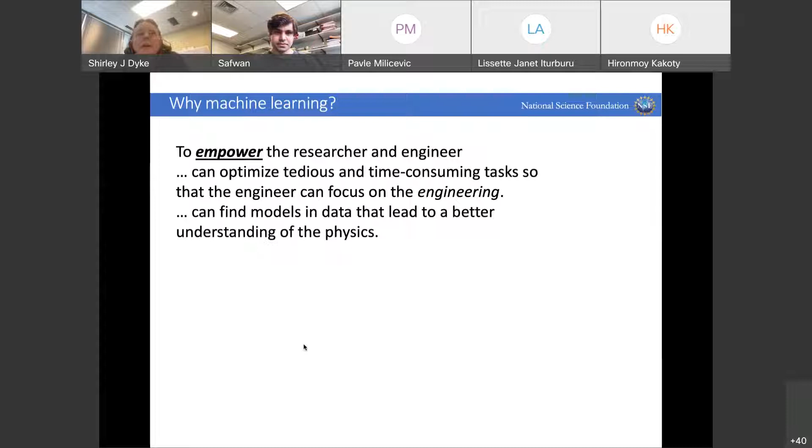I don't think so. We're here to figure out how to use machine learning. We're researchers, we're engineers, we're probably not going to develop new machine learning algorithms. But what we can do is figure out how to empower the researcher and the engineer to optimize tedious, time-consuming tasks, so that we can really focus on better engineering. How can we find models in the data, or information in the data, that might lead to a better understanding of the physics?

I like to show this in some of my presentations, and I'm just going to repeat it here briefly. What we often do is the typical solution approach: we build a model, maybe a finite element model. We input our inputs, the forcing function or whatever it is, into our model, and we get an output. That's what we learn to do in our classes, and that's what we learn to do for many of our research projects. But machine learning turns that around, and we say there's an input that we know, and there's an output that we know, but what we don't know is that process, that model.

This is the machine learning approach. We're trying to find the process. And if we can find that process, then we can spend our time focusing on gathering good quality data and focusing on the engineering that we can learn from that problem. So that's just, in a simple way, the way I like to think about it. We're trying to find the process.

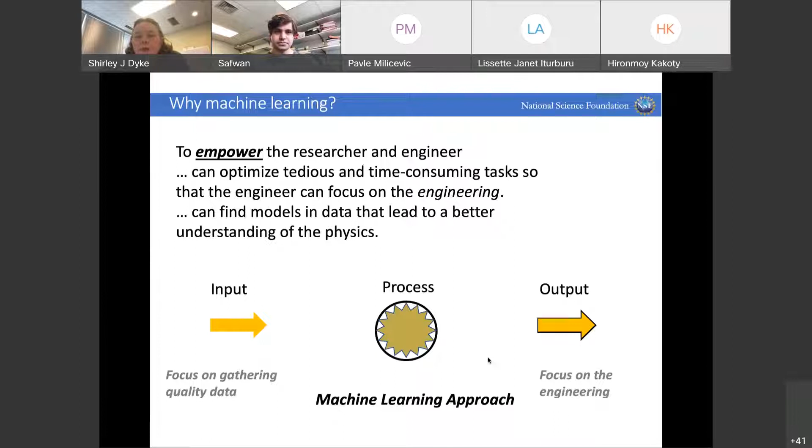We hope that by finding that process, we're going to be able to reveal or understand the structural behavior better. For the most part, we're structural engineers, wind engineers, doing those types of things. So we want to understand better how to build these structures, and we want to improve the hybrid simulations that we do, and we want to learn more from the tests and our data. So we're not trying to do machine learning to do machine learning, or to advance machine learning, but to figure out how to apply it to the problems that we want to solve.

Hi Shirley, this is Jim. I sent you a chat. I was going to have Safwan present. I had kidney stone mishaps this morning, so sorry about that. I'm here, but it's best if Safwan presents, he's done all the work, so he's well qualified to get the credit.

Can you see my screen? This is Safwan, yes we can. It's not in presentation mode, maybe you want to put it in presentation mode. Is it fine now? Okay, thank you Professor Ricles. So my name is Safwan, and I work with Professor Jim Ricles.

Most of my research is about real-time hybrid simulation, and I will be showing you a way where at Lehigh we managed to integrate real-time hybrid simulation with machine learning.

This includes the soil structure interaction. Especially if you have a building and you're trying to assess its behavior under multi-natural hazards, you want to include the soil structure interaction and know the response of the building if you include the interaction between the building and the foundation.

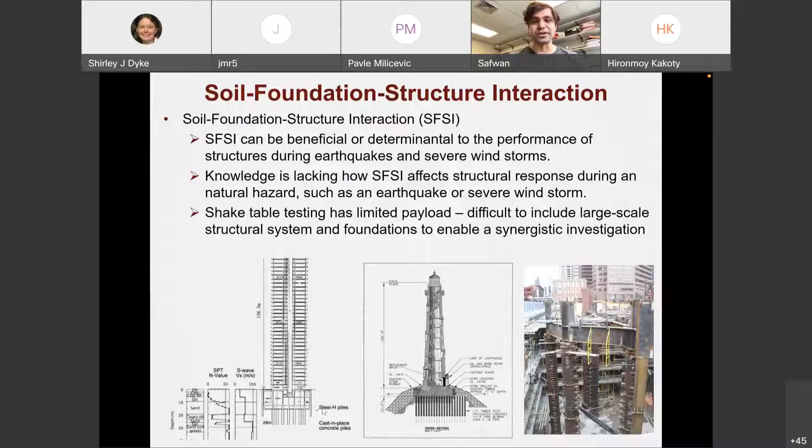Here is a real-time hybrid simulation case study. You have a 40-story steel building with 4 basements and 40 stories above grade. The building is located in Los Angeles and designed by SGH. The purpose of this study is to improve the behavior of the building and assess its performance under multi-natural hazards.

If you look at the building, we put nonlinear viscous dampers, highlighted in red, between each outrigger column and outrigger in the building. We use real-time hybrid simulation to assess the behavior of the building in real time.

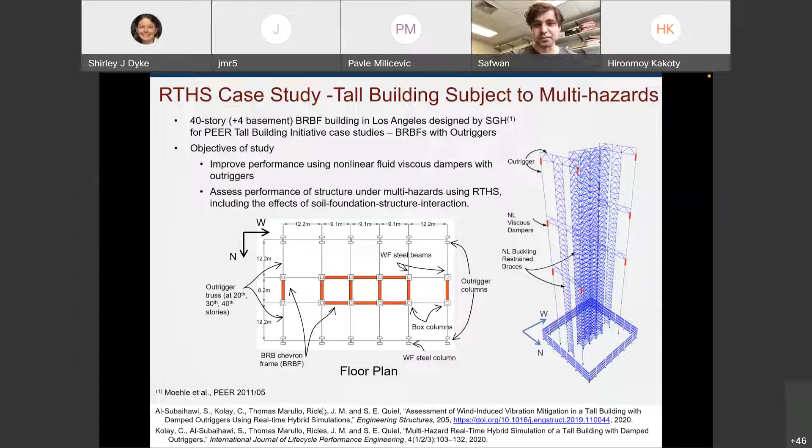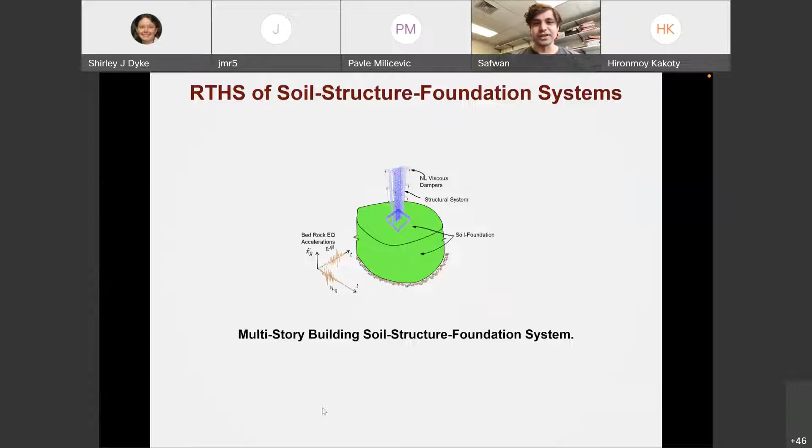Here is what it boils down to. You have the building and the soil underneath. In your hybrid simulation, you want to include, or see, the behavior of the full system, as you can see in this slide.

So why hybrid simulation? You will be able to account for the full dynamics of the system, while including only the critical part in your hybrid simulation. It's especially good if you have a rate-dependent device.

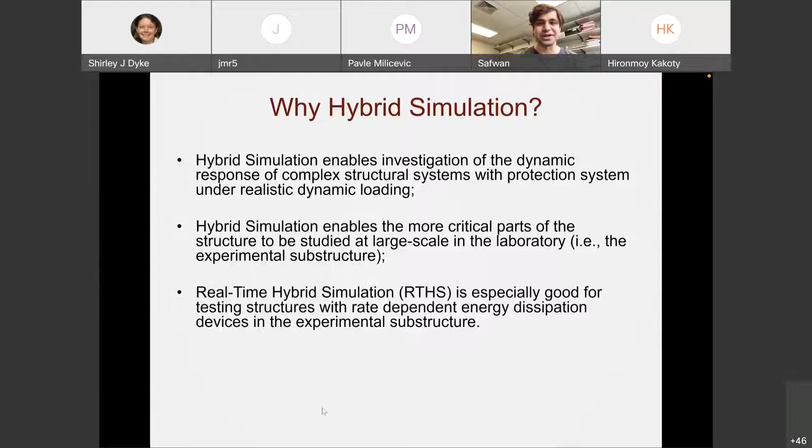In this study, you have a nonlinear viscous damper, and you want to be able to do the hybrid simulation in real time because the behavior of the device is rate-dependent.

The challenges: if you want to include the soil structure interaction in the numerical substructure of the hybrid simulation, you end up with many degrees of freedom and many elements. Doing state determination or solving the equation of motion takes too much computational effort that is prohibitive in the hybrid simulation.

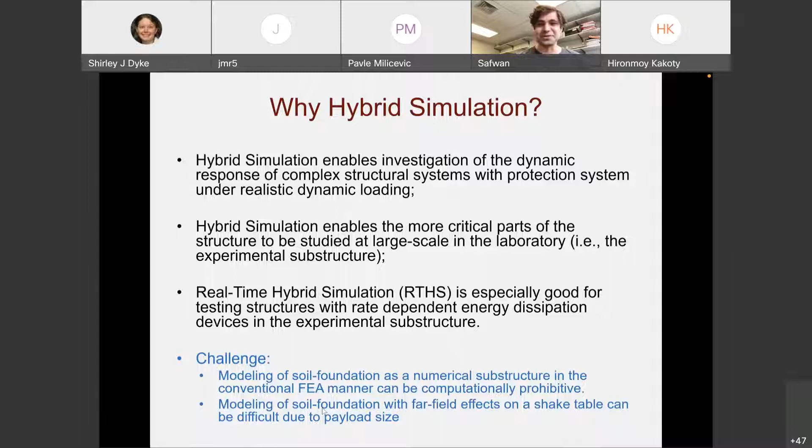If you want to include the soil structure interaction with the far field and use the shake table, it's going to be difficult. So we want to go with the hybrid simulation approach.

Here is how the analytical substructure looks like. The experimental one is a full-scale nonlinear viscous damper. You have the outriggers and the other dampers in the building, modeled analytically using an explicit-based online model updating approach.

The model has almost 8,000 degrees of freedom and 3,000 elements, and we use reduced order modeling. You have the geometric nonlinearities, the mass, and the inherent damping of the building.

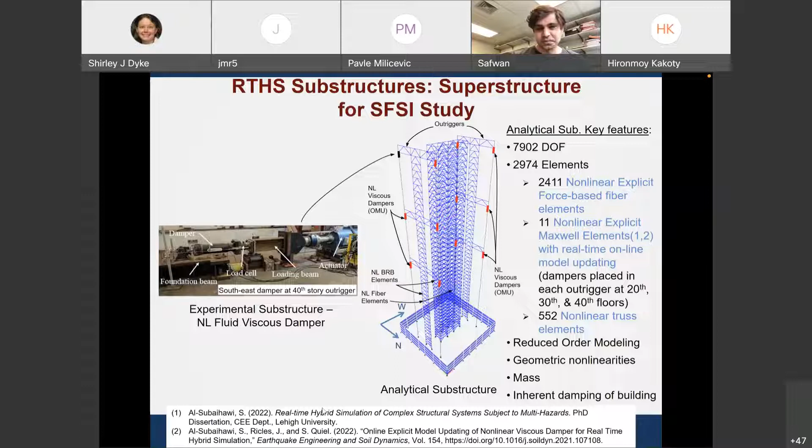Here is the framework. On the right, you have the experimental substructure. On the left, the analytical substructure, you have the building, and the soil underneath the building modeled using a neural network.

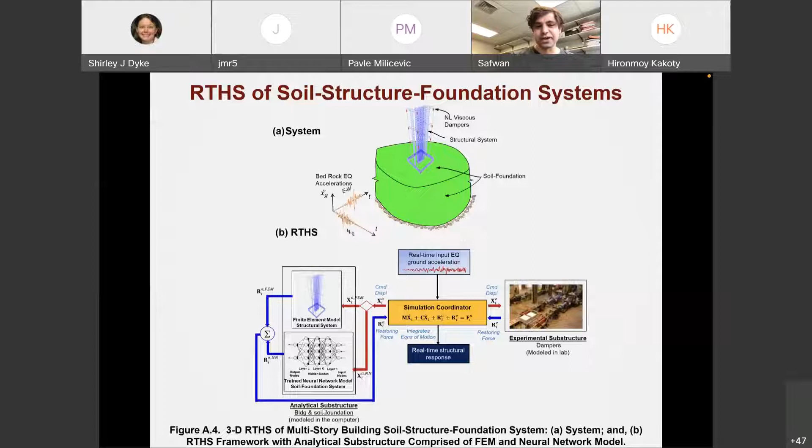Here is how it looks like. You have the building, here is the full model. We started in 2D, but eventually we will migrate to the 3D model. The building has 344 nodes. This is the structure. The soil underneath has 1,600 nodes.

You're trying to replace the soil with a neural network, as you can see in the middle. You keep the building, but the foundation underneath and the soil are modeled in a neural network. You end up with 6 outputs for the interface between the building and the neural network. At the beginning, the foundation on the soil has more than 1,600 degrees of freedom, but with the neural network, you end up with only 6 outputs.

This enables you to solve the equation of motion faster and run it in real time while accounting for the soil structure interaction.

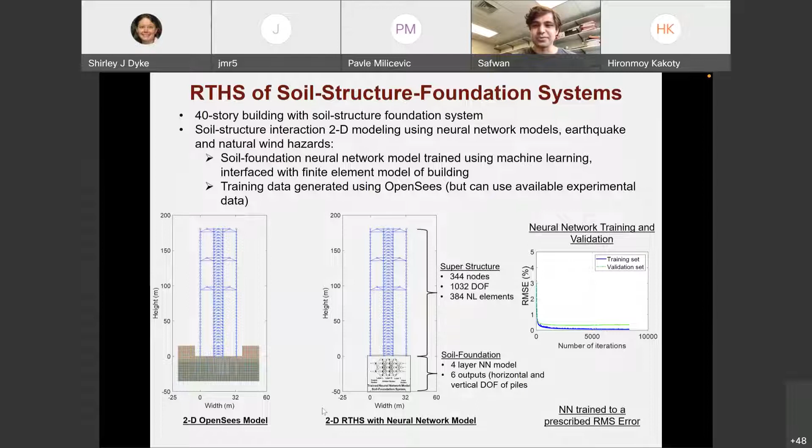Here's how the training works, I guess everyone is familiar with training a neural network. You'll end up with a large error, and with time and more training, the error goes down.

So here is the soil characteristics underneath the building. You have the shear modulus, skin friction for the piles, and the unconfined compressive strength.

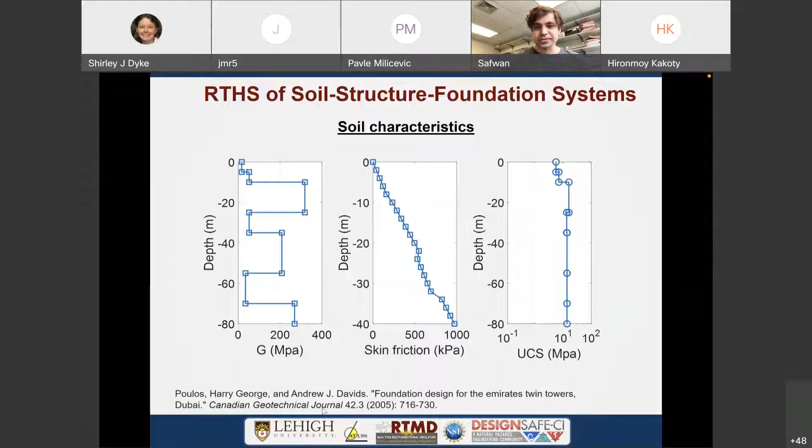So if you look at the peak story drift, again, you'll see a difference if you have the soil structure interaction versus not.

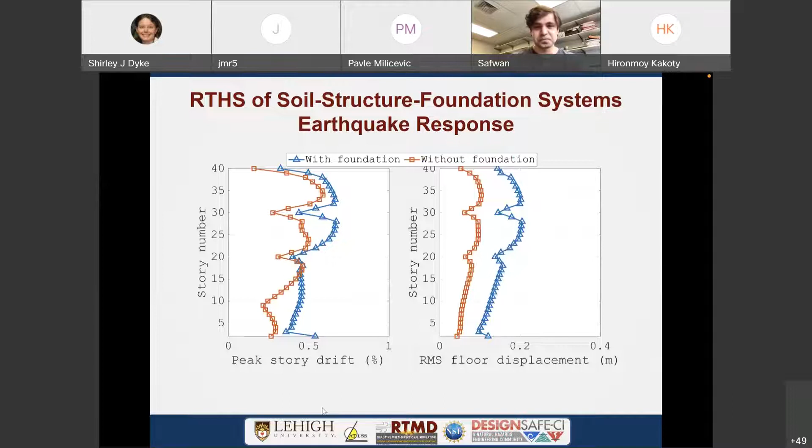On the right, this is the response of the damper. Again, including the soil, the behavior of the damper is different. On the left, you have the pile force versus the pile head deformation. This is at 2 different locations.

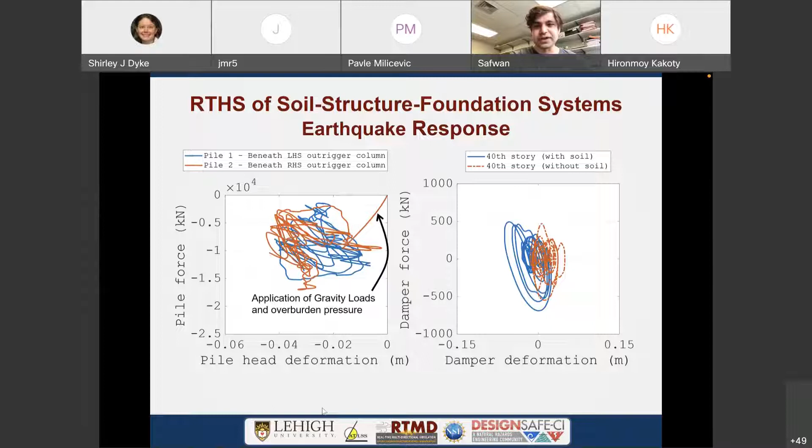So that was the earthquake. The other implementation is the wind. For this building, we got the wind tunnel test, the force history, the wind force from Florida International University.

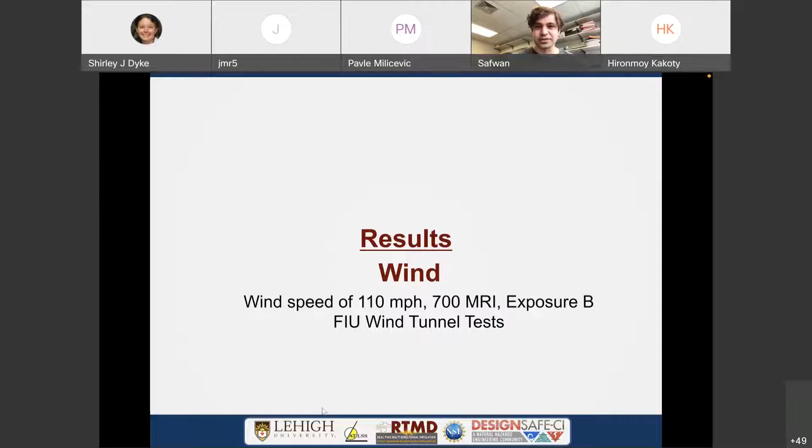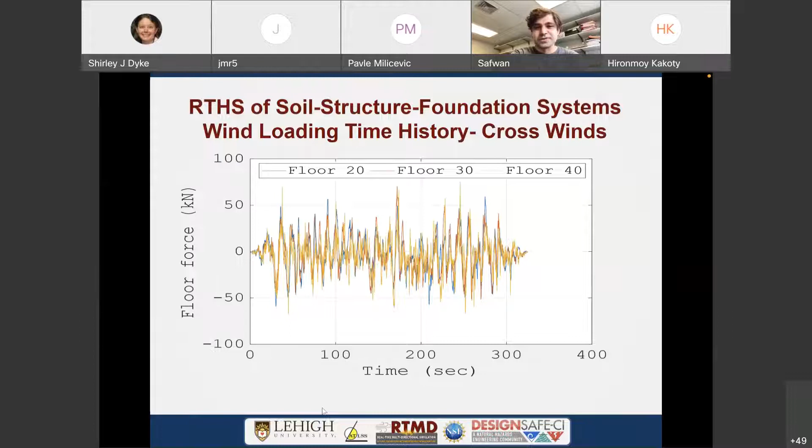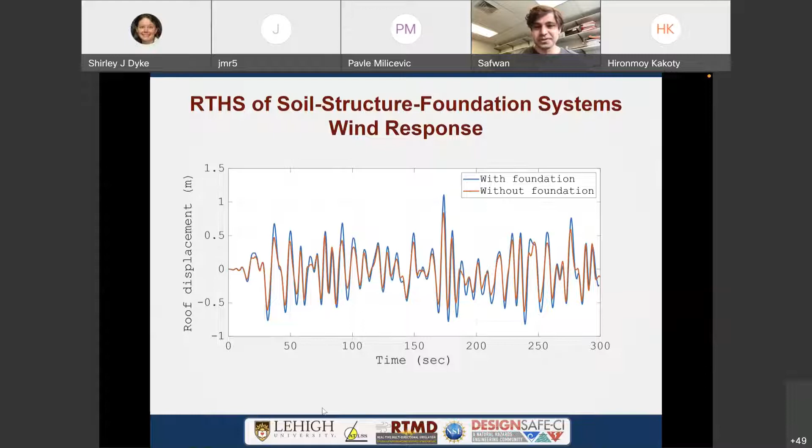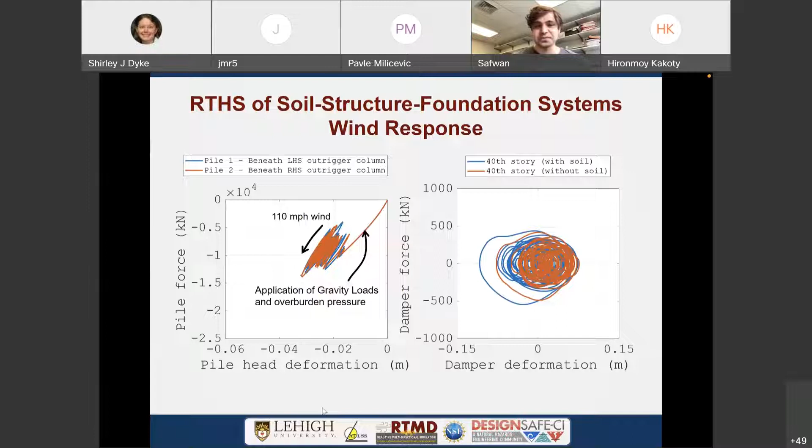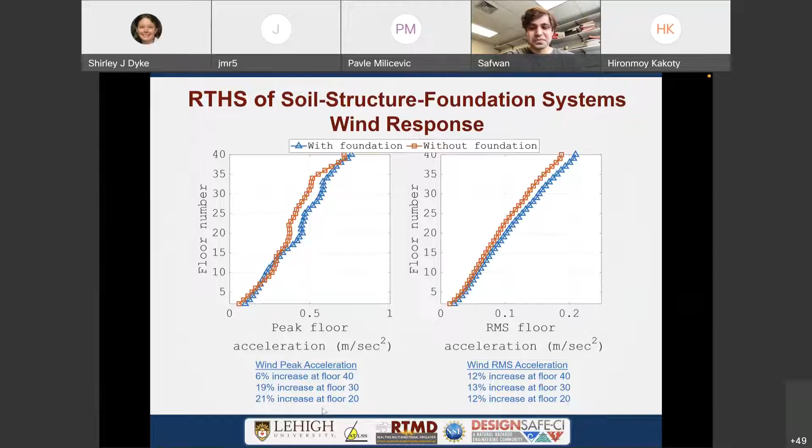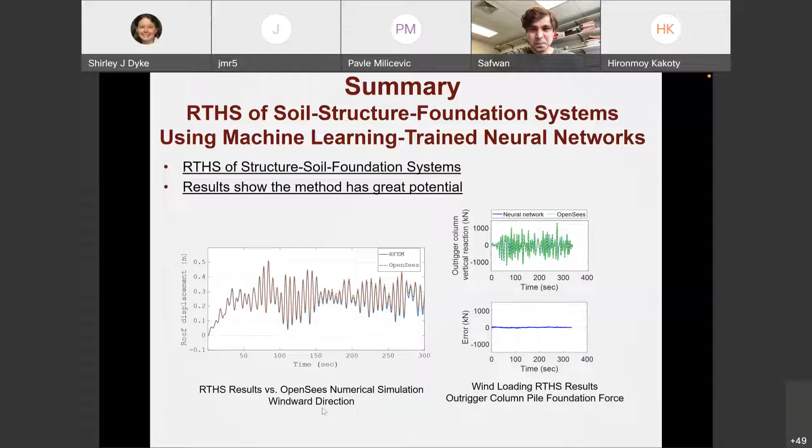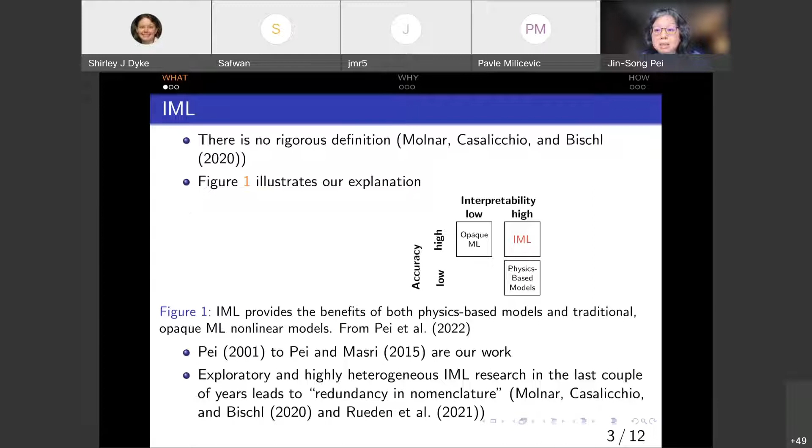Over the years, we have been developing our work, and the interpretable machine learning area has been growing rapidly, and there's some redundancy in nomenclature. For example, leading researchers have identified informed machine learning or interpretable machine learning, and they educate us that they see their similarity. So I use this acronym here. It could be interpretable machine learning, and it also could mean physics-informed machine learning.

So with this, I'd like to focus on the scope of work. We have been limited, focused on universal approximator, the sigmoidal neural network, because this is the most basic, this is the foundation for approximating nonlinear functions.

So we focus on answering two key questions. The first is the number of hidden nodes, which is not given in this universal approximator theorem. And also, we are very interested to know the initial values of weights and biases for the training to start with.

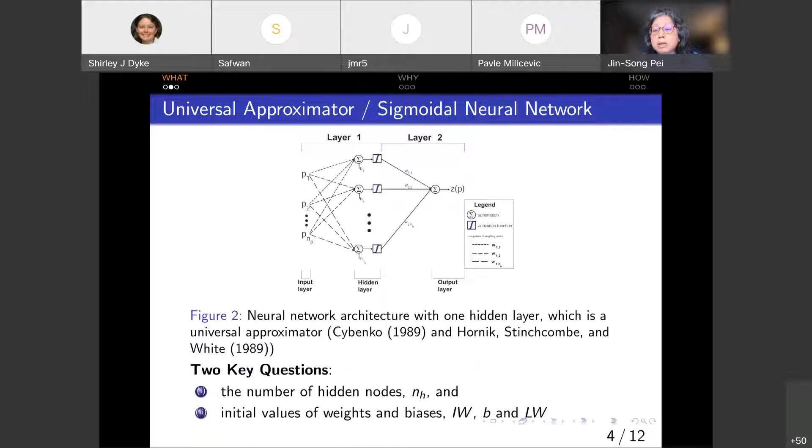So I'd like to use this table 1, which I will mention down the road, as a motivation. There are lots of domain knowledge in our applications of how we can utilize the domain knowledge to set up a neural network so that we have an idea about what's going on, why we define the neural network architecture in a way, so that a neural network will no longer be a black box.

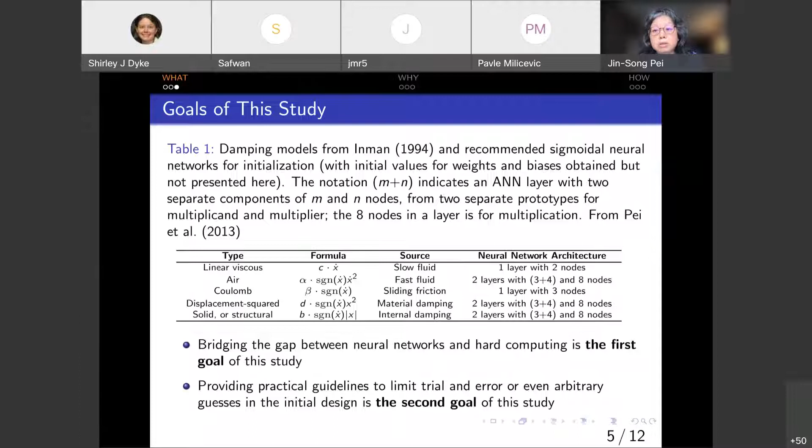And also, we intend to provide practical guidelines so that we can save a lot of time to be efficient. So with this said, first of all, I'd like to review the capabilities of sigmoidal neural networks. I'm giving you an example.

If we choose two hidden nodes by defining their weights and biases like this, their linear sum actually will lead to constant 1. So this is the simplest example to show that there are lots of insights that can be provided algebraically.

So by doing this line of work, we have come up with the so-called neural network prototypes that can be used repetitively, that actually do not require training anymore, because we prepare them beforehand for use in practice. And so when we deal with polynomial fitting for basic arithmetic operations, et cetera, we know what to do. We know how to set up neural networks, how to assign initial values.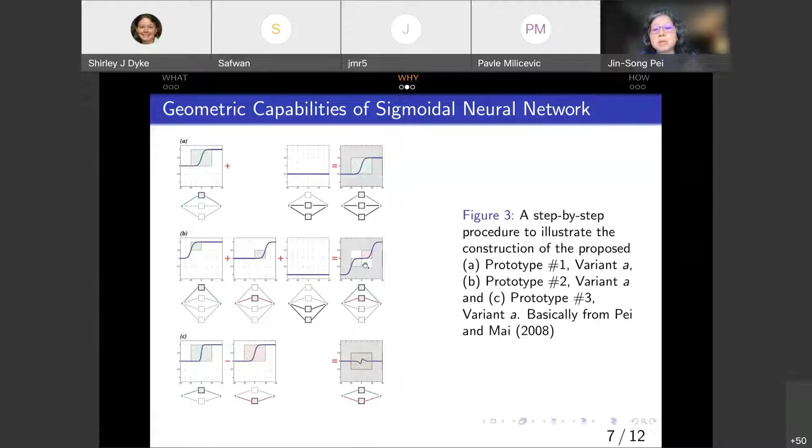Here, we're utilizing two sigmoidal functions by shifting them through adjusting their bias values, and then taking the active range as such, and also removing the constant level that we just talked about by using two hidden nodes. So in total, using 4 hidden nodes, we should be able to capture a hardening type of nonlinearity.

So we have other prototypes built, 3 of them, to individually or in combination approximate, for example, 10 types of nonlinearities, including linearity, that often are useful in system identification.

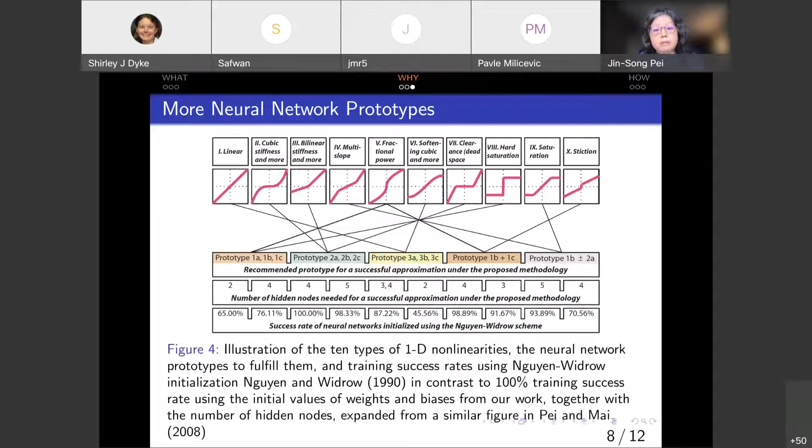So coming down to the last portion of this presentation, in summary, over the years, we have been interested in developing interpretability elements. We call them elements. So first of all, we have a collection of useful basis functions and features in system identification in approximating nonlinearities. The examples were given previously in table 1 and also the figure I just showed.

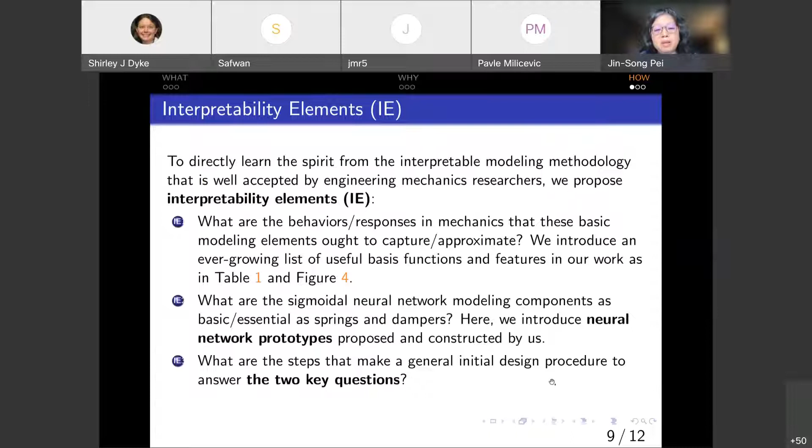And then we come up with neural network prototypes that are derived beforehand, that are not trained. We derive them beforehand, so that we can use these prototypes as efficient modeling building blocks, such as springs, dampers, and we want to use them that way. So with these two done, how to make things happen?

So in reality, when we have experimental data, for example, in a force state mapping setting, when we want to approximate nonlinear restoring force as a function of displacement and velocity, this is just an example, we could introduce a user in the loop to compare what we already prepared for the prototypes' capability with the features observed in data. Then we can come up with strategies.

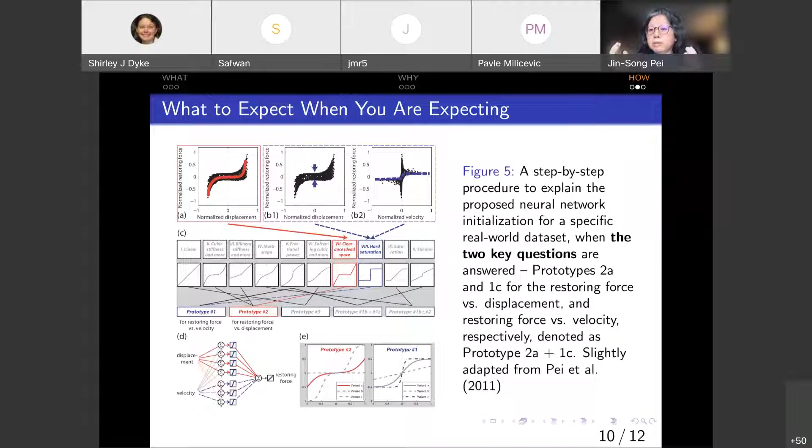We selected these 2 prototypes and we combine them together, concatenate them together to increase the width of the neural network. And from time to time, we will have to add different layers. So this is how we do it. So this is the last slide of this presentation.

Interpretability in this work shows up in 2 aspects. One is domain knowledge in engineering mechanics. The other one is domain knowledge in applied math, in terms of capability of sigmoidal neural networks, and also data-driven. The data-driven nature in our work shows up not only in the training itself, but also in the dominant features in the data we want to extract, so that we know better what prototypes to select.

Okay, so over the years, we also have been seeking justifications in our work. And also continuous development currently is with my computer science collaborators in robotic kinematics. So currently we have been moving to 3 inputs for hidden layers.

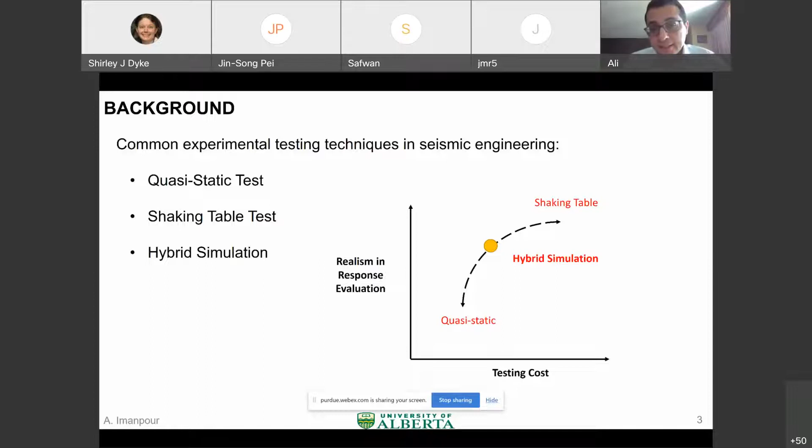Okay, hybrid simulation sits somewhere between quasi-static testing and shaking table testing in terms of testing cost, and also the realistic response that we're expecting under random excitation such as earthquake acceleration. So it basically gives us a trade-off between the complicated shaking table, with more accurate results, and the probably less expensive quasi-static testing, which is done under predefined displacement that may not represent what we expect under seismic loading.

But in conventional hybrid testing, we have some concerns. Number one is that the results can easily become biased because of the selection of the experimental or physical substructure. The way that we typically do conventional hybrid testing is we identify one of the elements that are expected to yield, become nonlinear or sometimes become unstable, and then we physically model that in the lab and run the laboratory testing. I'm going to focus on pseudo-dynamic hybrid testing. At the same time, we run our ground motion and numerical substructure.

So you see an example here, a concentrically braced frame, where we had concern about the instability response of the columns, and we removed one of the columns. We tested it in the lab, as you see on the right-hand side of your screen. The test went well, of course, and we saw the buckling of the column as expected, the right-hand side column, the one that we physically tested in the lab.

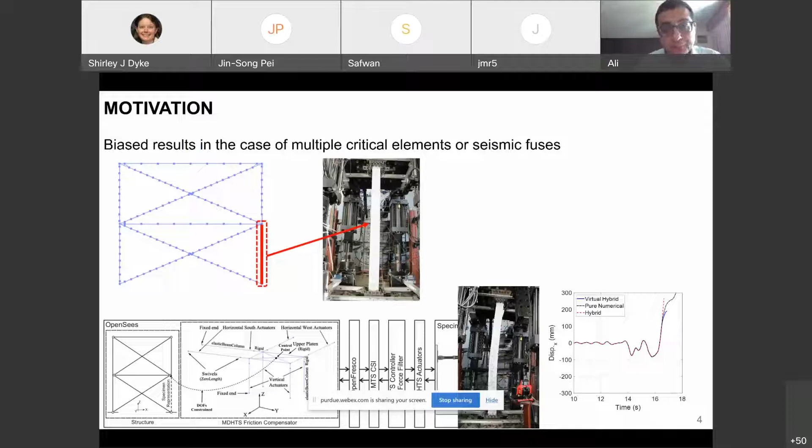But the left-hand side column could have also buckled if we had physically modeled it in the lab, if we had sufficient equipment in the lab to model two specimens. And the displacement response could be a little bit different because of a different displacement coming from a different ground motion, and some other numerical assumptions that may have changed the result. So we could have had buckling of the left-hand side column.

The other concern, which is a general concern about numerical simulations, and in particular in hybrid simulation, is associated with the elements that we numerically model in conventional hybrid simulation. And that's the dynamic characteristics of seismic fuses, or elements that are going to yield under seismic loading. Inherently, an earthquake induces a very complicated, random response in a structural element, and it can trigger different types of cyclic characteristics.

One of them is cyclic hardening, and in particular in steel that can highly depend on the type of loading that we are applying. On the right-hand side of your screen, you see the response of physical testing of a buckling restrained brace, one under a nice cyclic loading pattern at the top, and below another test, the same BRB, this time under a seismic induced deformation. If we zoom in a bit, we're going to see that the force at a given strain is not the same between the two loading protocols, and the reason behind that is the type of loading protocol, which creates different cyclic hardening in the BRB.

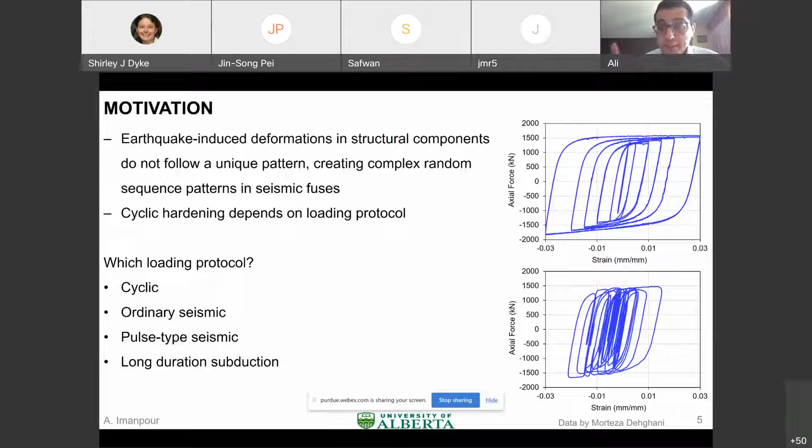So these methods and also the concerns that I mentioned led us to propose a method that is based on a machine learning technique which leverages the experimental data that we produce in real time in the lab during our conventional hybrid testing, in order to predict the response of the other seismic fuses that are not physically modeled in the lab and typically in conventional hybrid simulation are modeled in the numerical substructure.

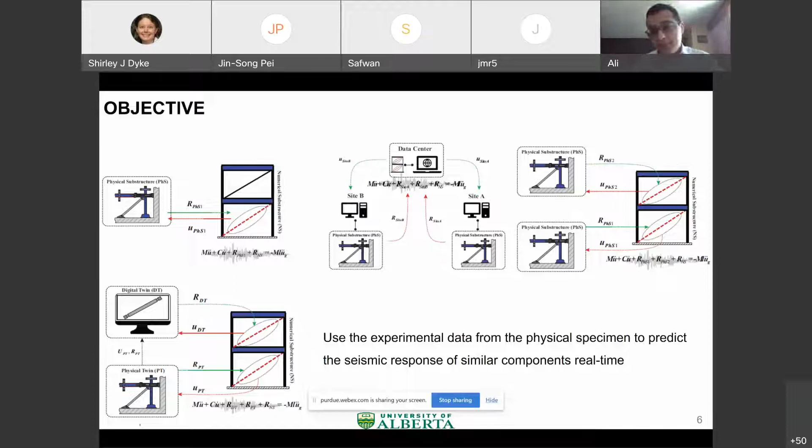So that's what you see on the bottom left of your screen, where we create basically multiple substructures, and we use machine learning, numerical simulation, and physical testing in order to predict the seismic response of the structures.

So I'm going to go a little bit more in detail of the proposed technique here with an example of a two-story buckling restrained brace frame. You see on the left-hand side is kind of a typical way of the modeling of a BRB, which we call reference model in the context of our work.

Then we create three substructures. Number one is a numerical substructure, which is physics-based, using equation of motion models that solves the dynamic problem, and models at the same time mass, damping and the stiffness of almost elastic elements such as beams and columns in this particular example.

Then we took out one of the BRBs, which is our seismic fuse that's expected to yield under seismic ground motion. We took off one of the BRBs, in this case, story 1 BRB, and then we test that in the lab. And the data produced from the experimental specimen, which we call a physical twin in this example, is communicated to the numerical substructure, similar to our conventional hybrid simulation, at the same time to our data-driven model, which is shown in the upper right corner of your screen.

And that data-driven model is basically reproducing the hysteresis response of other similar seismic fuses that are similar to the one that we are testing in the lab. So this guy here, which we call digital twin, is passively trained using past experimental data.

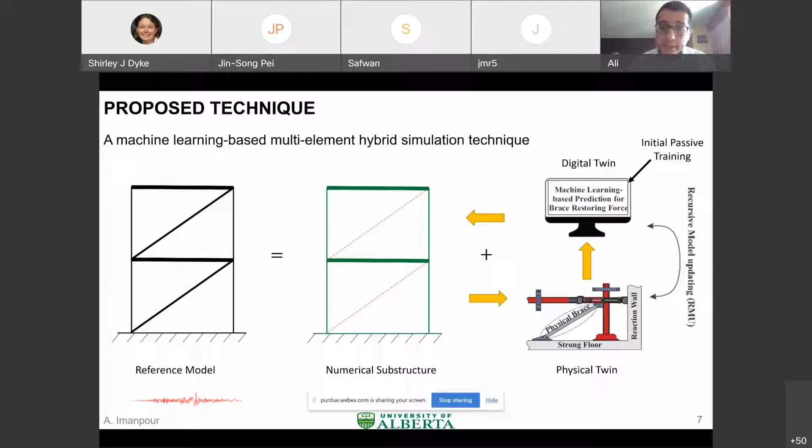So we leverage our available experimental data, and during the hybrid simulation on the fly, we update its prediction capability using recursive model updating technique in order to better predict, for example, that cyclic hardening that I mentioned, while the ground motion is affecting our structure, and we are producing data, real-time data in our physical twin.

So a little bit on the brain of that model. We use a Prandtl-Ishlinskii hysteresis model, which is a simple, elastic, perfectly plastic model. You see the equation that's basically governing the response of the hysteresis model. We combine multiple PI models together in order to produce the restoring force of the component that's going to be simulated into that data-driven or digital twin in our platform, in our technique.

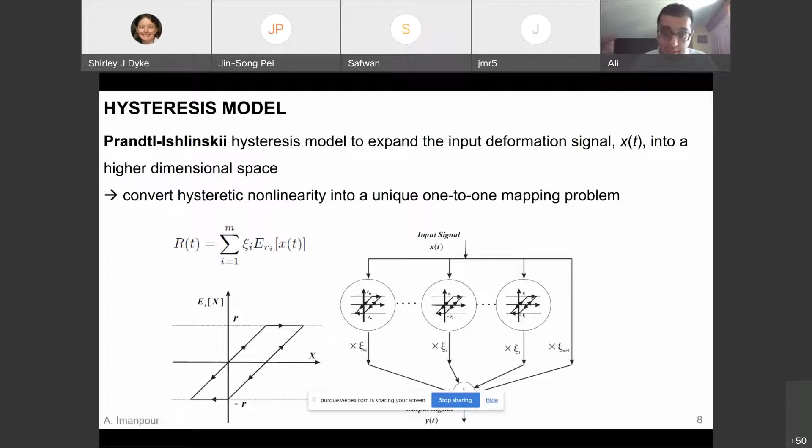So what it does, basically, this combination of these PI models or stop operators converts the hysteretic nonlinearity into a unique one-to-one mapping problem, which is favorable for machine learning algorithms, and we can basically leverage that in real time during our hybrid simulation.

So that PI model is combined with a sparse identification algorithm in order to find which component or which set of components or stop operators are important or are dominating or are giving us a better hysteresis response. So this combination is done in that library matrix that you see at the bottom left of your screen.

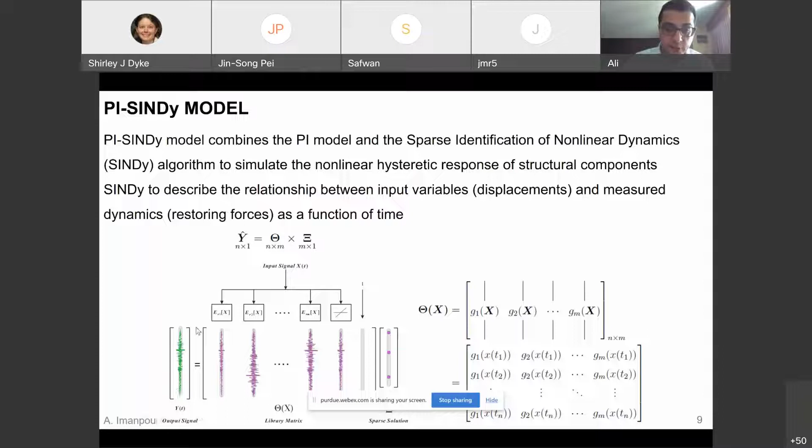So we put all the stop operators there, and we use a sparse regression algorithm in order to pick the stop operators that are going to basically help us to better predict the response of our hysteresis model. So eventually, what comes out from this equation is the output signal or prediction of restoring force.

So once we implement this technique, as I said, we also use real-time recursive model updating in order to improve what we already predicted using PIs in the passive training technique. So I'm showing you a verification. We've done a few verifications. This is one example of those verifications.

The first row on your screen, what you see is our reference model, which is a two-story buckling restrained brace frame. And the way that we modeled it, a little bit to the right, we created the OpenSees fiber-based model of almost elastic elements, beams, and columns, and then mass and damping in our model there. Integration is done there using our equation of motion solver.

And then we created an Abaqus model of BRBs which basically talk to our numerical substructures. That's our reference model. And then the bottom row, what we created is our new proposed hybrid simulation technique. We use a virtual hybrid simulation technique, and this is for the same two-story BRBF.

In the middle, what you see is the numerical substructure, very similar to the reference model. To the right, we have the BRB model, again in Abaqus, which is our virtual specimen in this verification example, and we put our data-driven model in parallel to our OpenSees model and Abaqus model, and connect all of them using UT-SIM platform.

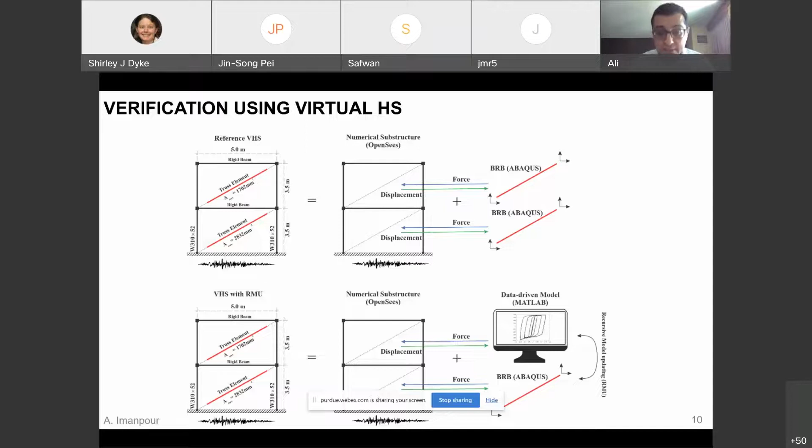So some results briefly. What you see here is that two-story buckling restrained brace frame. At the upper, the second story response includes story drift and also hysteresis response, and the first story has displacement and hysteresis response. What I would like to highlight here is, well, first of all, if you compare a reference model...

which is black, and the red model, or proposed model, which is red, you see a good prediction by the proposed method. We remove that recursive model updating, which is updating our prediction on the fly, in one of the verifications, and we created a model that is only passively updated, and that's given in blue to the right of the hysteresis model that you see. As you can see, recursive model updating can significantly improve the response of the prediction capability in the proposed technique.

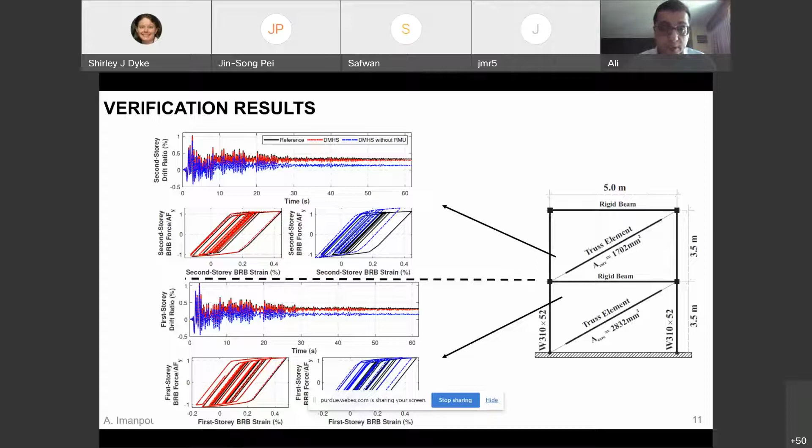Okay, to conclude my presentation: by using the substructuring concept, we combine three things basically: a numerical substructure, a data-driven model that we develop, and also an experimental specimen, and we connect them together. We basically propose the method to update in real time the response prediction of the data-driven model in order to predict, for example, cyclic hardening parameters or properties that are dependent on the type of loading that you apply during hybrid simulation.

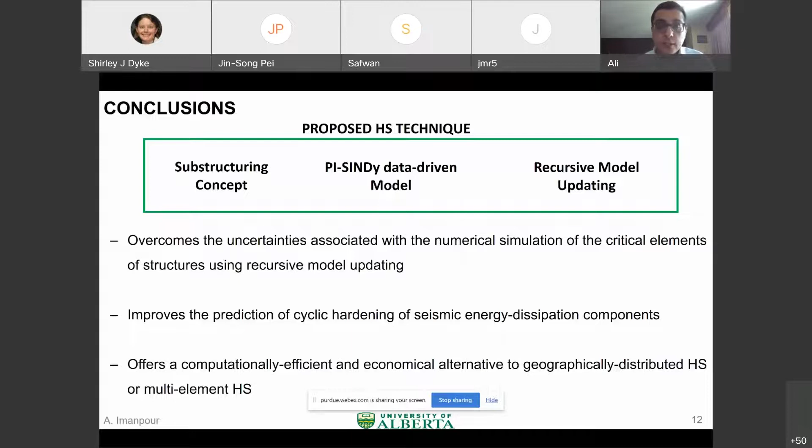So this technique can overcome some of the concerns that I mentioned, for example, the bias response due to the numerical modeling of the other critical elements in typical and conventional hybrid simulation. It can improve the prediction of cyclic hardening, in particular in steel structures, and it can offer a computationally efficient and economical approach compared to other proposed techniques, because this technique is basically an integration-free technique that is helping to significantly improve the computational time and computational effort that's critical during hybrid simulation.

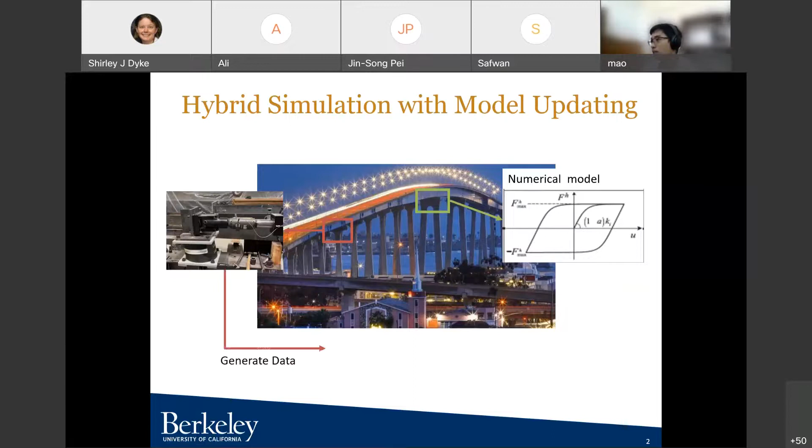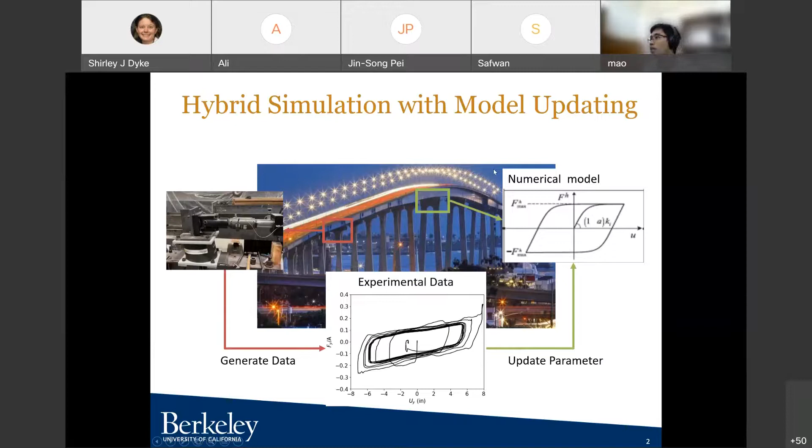As we already know, hybrid simulation divides the experiment into two parts: the physical test part and the numerical simulation part. The point of hybrid simulation is that the behavior of the experimental test is less well known, and sometimes there are similar elements or materials in the numerical simulation as well. In this situation, we use model updating that uses the experiment part to generate some data and use this data to update the parameters in the numerical simulation. This model updating hybrid simulation can improve the accuracy of the whole test.

However, there is still something that can go wrong. The model updating hybrid simulation is not the perfect solution to every problem. The first issue is there could be inappropriate initial parameters in the model, and it will lead to some unstable analysis or even failure of the numerical simulation. On the left figure here, you can see the blue line is the failing result of some parameters, which can go to very big or small numbers, while only the red part is the proper range of it.

To solve this, we can use a WACUKF, which I will introduce later. The second problem is the limitation of the pre-selected numerical model. If we select a model, we cannot capture features that are over the boundary of it. For example, when I get some experimental data on the right-hand side, I have a hysteresis loop like this, and I'm trying to use a linear spring to fit this data. It's definitely not a very good idea because I cannot capture the damping or the energy dissipation in the hysteresis.

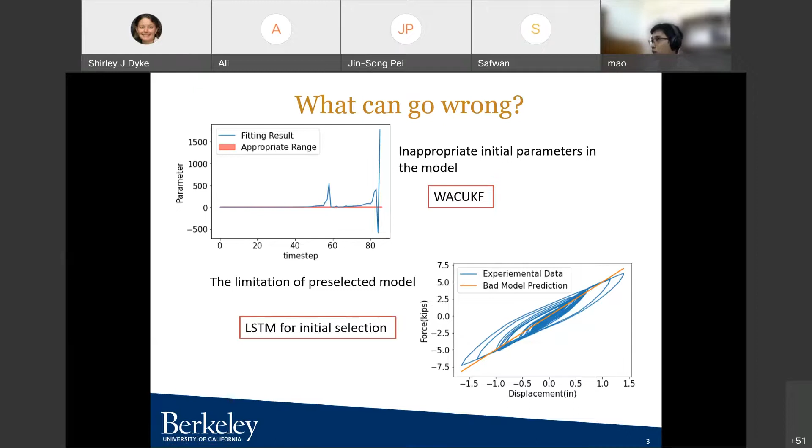We have proposed to use LSTM for the initial selection to solve this problem. And you may ask, what is WACUKF? WACUKF is actually the weighted adaptive constrained unscented Kalman filter. It combines the constraint, unscented transformation, the weighting factor, and adaptive calculation. There is a lot of great work and research in model updating.

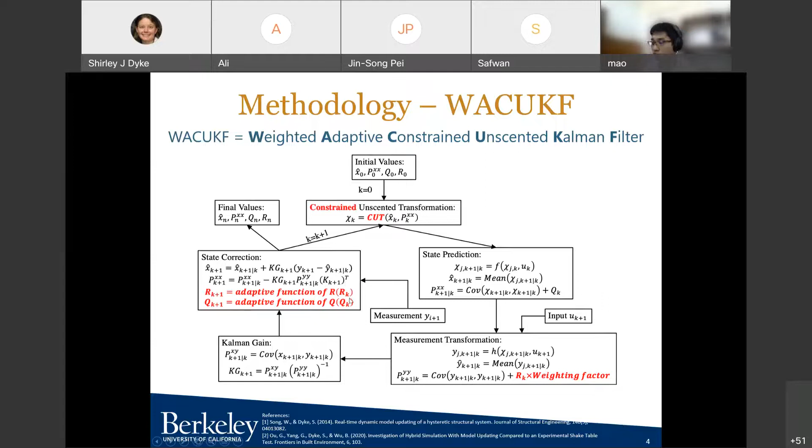Professor Dyke's research group has done a lot of fascinating research in model updating using not only the original UKF but also the constrained UKF. We have done the same thing, adding the constrained unscented transformation into the cycle. In the measurement transformation step, we added a weighting factor, and in the state correction, we added an adaptive function for calculating R and Q, the two matrices in the unscented Kalman filter.

We are numerically simulating the Coronado Bridge model, shown on the left, and we have physically attached one bearing of it, shown on the right. This part is in collaboration with Camila Lopez-Ruiz.

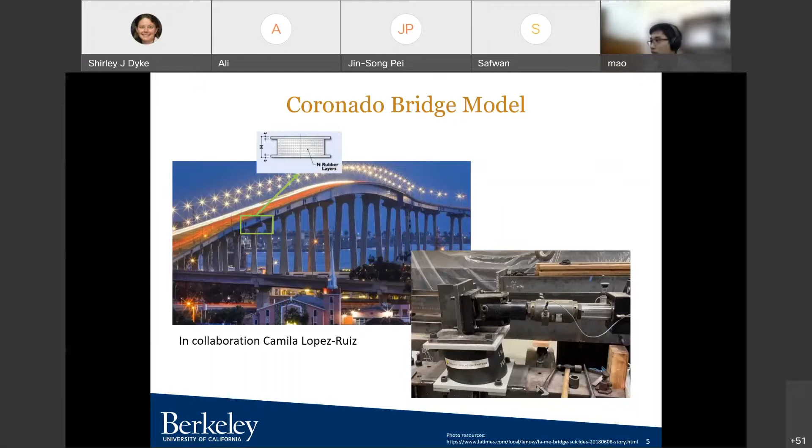We validate our model updating by physically testing the bearing on column 13, which has the largest displacement, and putting the other bearings into the numerical simulation. We update the properties of these other bearings during the test using the experimental data, then collect the displacement time history from the numerically simulated bearing and retest it physically. For example, we can pick the column 5 bearing for the physical test again, then compare the experimental hysteresis with the numerically updated hysteresis.

The figures below show the results of the original UKF on the left and the WACUKF on the right. We can see the results are very similar to each other.

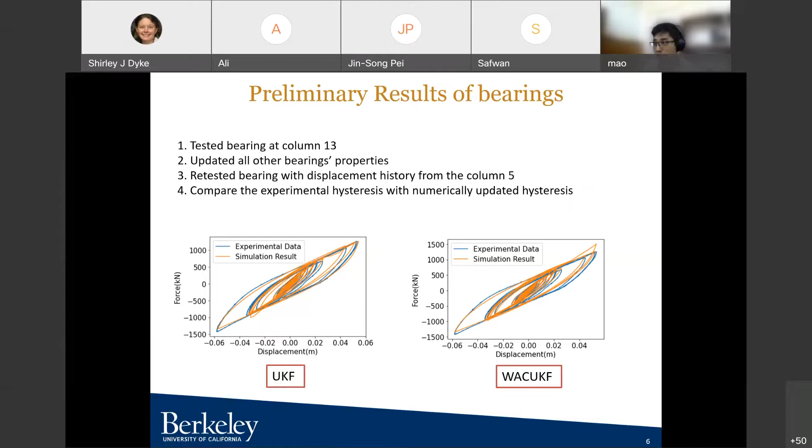Now let's take a close look at the change of parameters during the test. The red line is from the original UKF and the green one is from the WACUKF. We find that in the WACUKF, the convergence of all parameters is much faster than the original UKF, which is a good signal, because the faster the convergence of parameters, the more stable the model is.

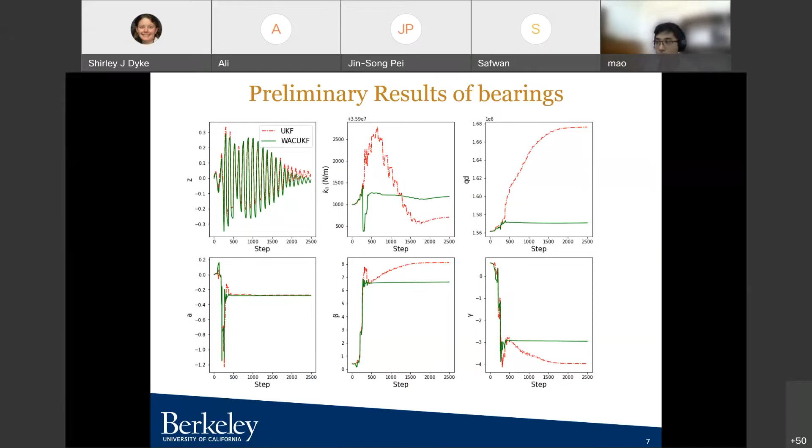Now for our new session: in the full setup, we're not only testing shear force like in the first phase, we also need to consider rotation and axial load. This leads to a new challenge, because all degrees of freedom, including axial, shear, and rotational behavior, are coupled with each other, and we found limited research on that. So what model should we use, and how do we find the most appropriate one?

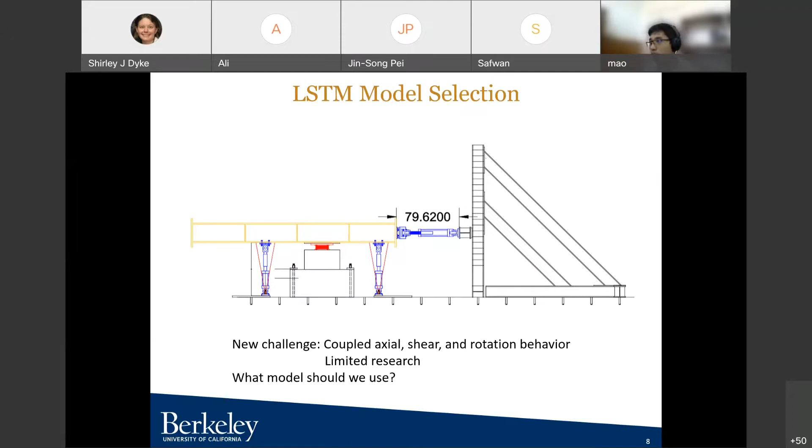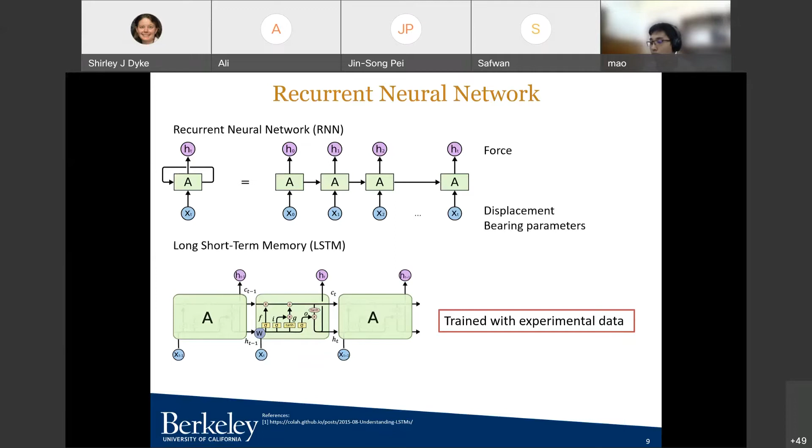To solve this problem, we try to use LSTM, or recurrent neural networks. The recurrent neural network repeats the neural network at each time step, feeding in the displacement time history as well as some bearing parameters as input, generating force feedback as output. The LSTM is a variant of the original RNN. In our research, we train this model using only experimental data rather than generating a dataset from OpenSees simulation, because this way we can greatly reduce subjective bias. Here is our result from the fitting.

On the left and right, we compare the real experimental data with GRU, LSTM, and the Bouc-Wen model, whose parameters come from a genetic algorithm. We find the LSTM model has a better capacity for capturing nonlinear features, for example the hardening at the two ends on the left plot and the damping on the right plot.

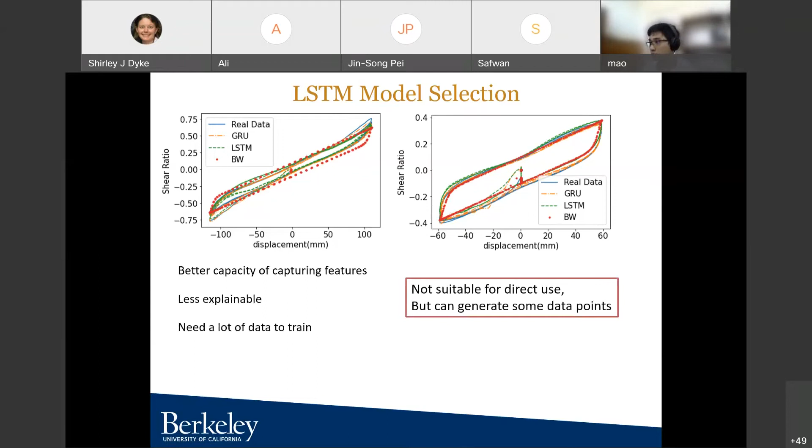However, because the LSTM is a very complex and large neural network, it's less explainable and requires a lot of data to train to reach a good result. So we believe it may not be suitable in our case, particularly for directly using the LSTM model in hybrid simulation. But we can generate data points and find the expected behavior of our element during the test, and use that for better model selection.